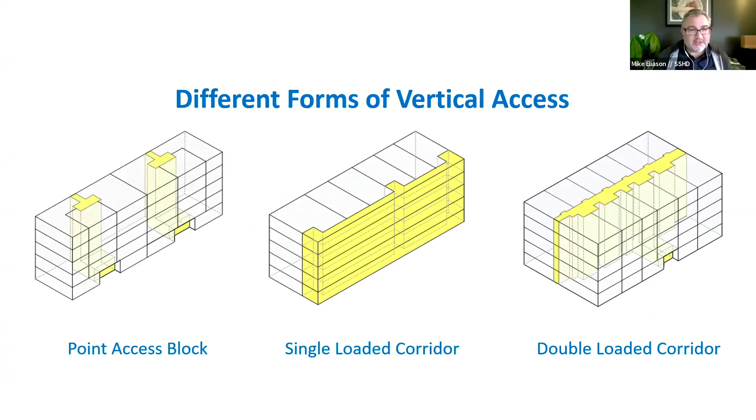So instead, what you'll see in new development like this is a bunch of smaller buildings that compose a much larger block. These are a broad mix of housing types. You could have co-housing next to social housing, market rate housing, condos, right? So at the block level, you get this really kind of elegant mixing of diversity, both economically and socially, that really is missing in a lot of the development in the US. So I'll talk about my approach to this, how my thinking really came around on single stair, some of the benefits, some of the issues around public health and climate that I think really make these better buildings. We basically have three methods of reaching units in buildings, and it turns out that the way that we get to these units has pretty dramatic knock-on effects.

The main one that we'll see in the US is the double-loaded corridor. This is required anytime you're taller than 3 stories or you have more than 4 units per floor. It's moderately efficient. It primarily induces smaller units, though, right? So it's really difficult to get large family-sized units, except on the corners. It's inducing a lot of windowless bedrooms as well. Primarily, we put dense housing on arterials, major highways. And so if you're on a loud street, you can't really get away from that noise if you're on the side of the building facing the street, right? So these really are hotels. We're designing our multifamily buildings to be more like hotels. And so it has really different qualitative effects versus the status quo of development the world over.

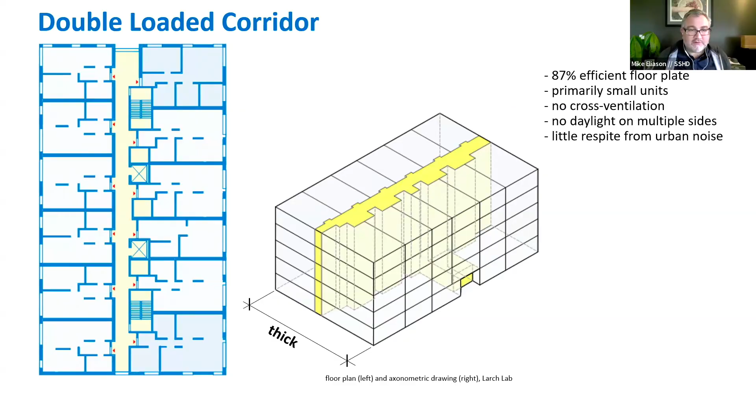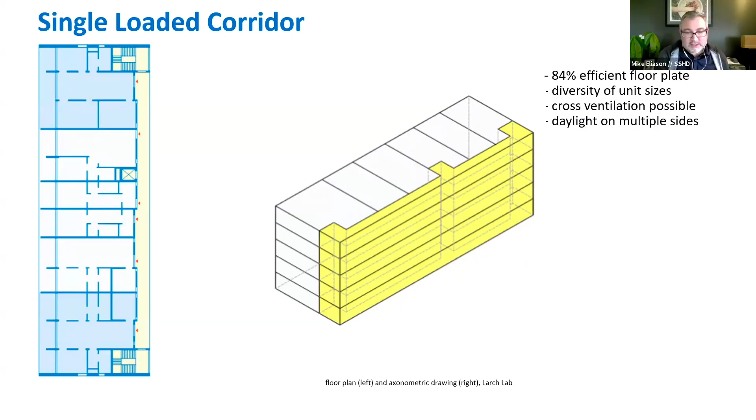Single loaded corridor is actually more common in Switzerland and a number of other European countries. You get the ability to cross ventilate. You can have daylight on multiple sides. It's not as dense. It's harder to get more units than you would find in a double loaded corridor or a single stair. And so, for a number of reasons, we don't really see it utilized here. But the point access block, the single stair building, is really the workhorse of urban housing pretty much the world over.

The idea is you've got a handful of units that are all around a single core, elevator, stair. These buildings tend to be more compact. They are incredibly efficient in terms of floor plate. They're much thinner floor plates than we see with double-loaded corridor buildings, and so there are more opportunities for green space, community, and things of that nature.

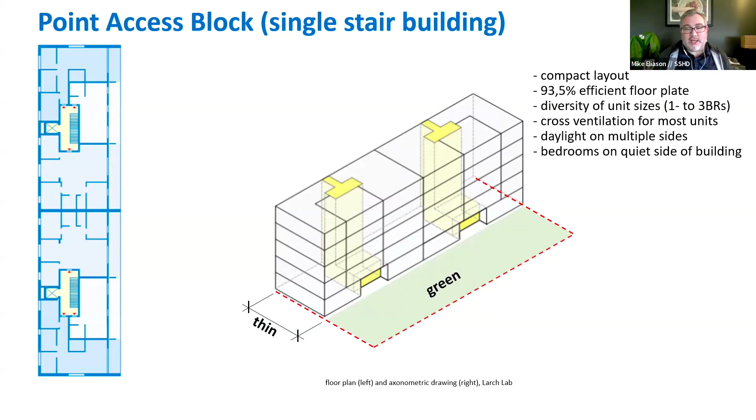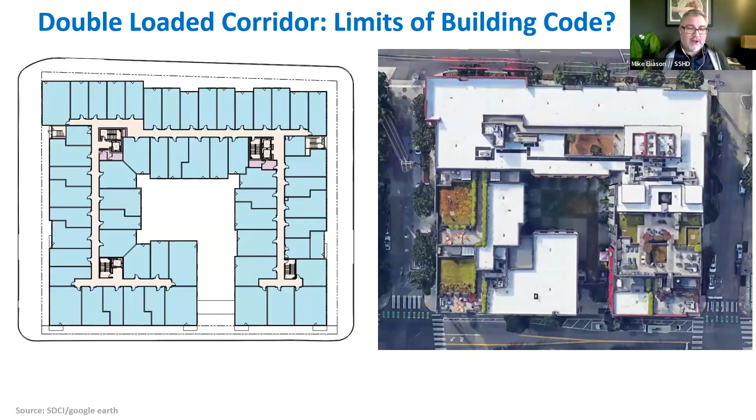And the double-loaded corridor is really the status quo of pretty much all development in the U.S. We're kind of reaching the limits of it. On the bottom left, you can see a corridor with a couple of units that are separated from the stair right there. So we actually already have conditions in our multifamily buildings that are more dangerous than you would find in single stair buildings. So you've got 1, 2, 3, 4, 5, 6, 7 units that if there's a fire right next to that stair on the bottom left, they wouldn't have any exit to access whatsoever.

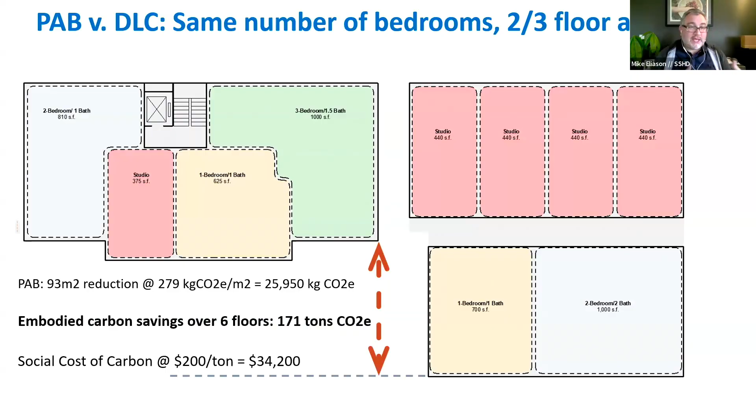Right. And so this compactness, what's really interesting about it is in less floor area, we start to get the same number of people, maybe not the same number of units, although there are some ways to play around with that. This in turn, I think, leads to potential cost savings, embodied carbon savings, right? And then, like I said, our buildings are thinner, and so there are more opportunities to play around with other things on the site around the building.

Our codes and our financing regimes have effectively eliminated small scale development in most of the US. And so we've really seen small buildings, under 30 apartments, really fall off a cliff, whereas buildings with more than 50 units are now the norm. This is completely outside of the norm for most of the world. In Germany, a fourplex has been the median building for almost 70 straight years.

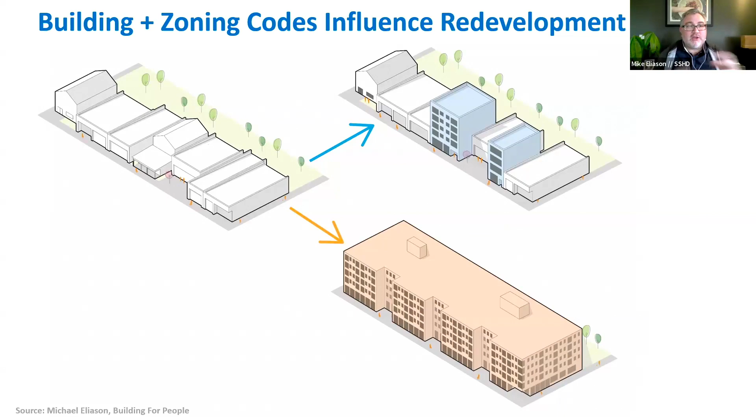And when we're thinking about how places redevelop, right, the single stair allows small scale urban development, that fine grained development to happen over time. You don't need parcel assembly. So if you're a building owner, you can just sell your lot to one developer, or you could redevelop it yourself and do your small little building. And so you get this more fine grained redevelopment instead of what we tend to see, which is one developer comes in and buys up most of the block or all of the block and then completely redevelops it. And you lose that fine grained nature. You lose all those businesses that really made such a great place to live.

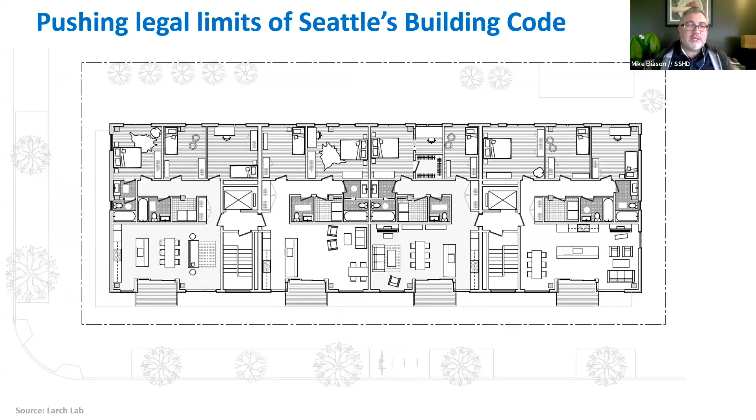This is a study that we did for Seattle when I was at Larch Lab. Our conditions allow up to 6 stories. So the US baseline is 3 stories. Seattle allows up to 6 stories. We can do up to 4 units per floor, so 4 units per stair per core or per floor. We can do 2 of these conditions. So we can get moderately scaled buildings, right? So 24 to 48 unit buildings with these kinds of conditions.

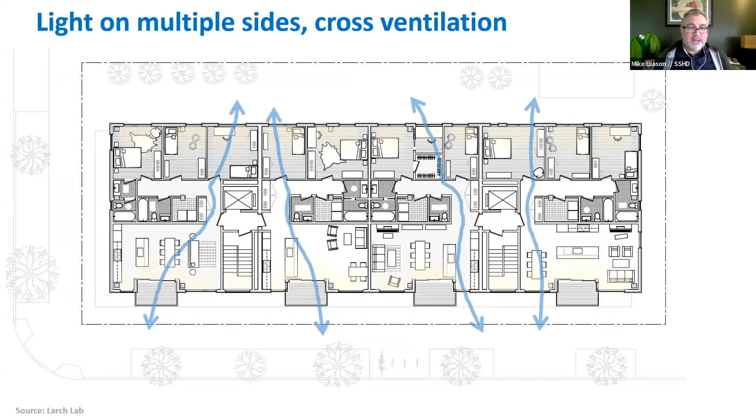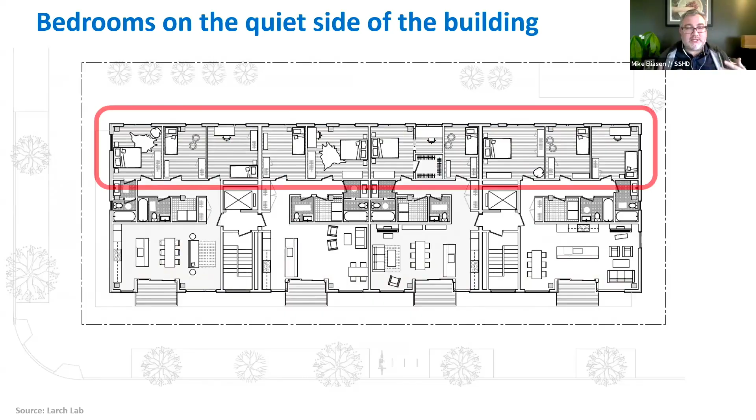What I find really fascinating, though, is it allows us to start living in ways that you don't normally see in multifamily buildings. So the point access block allows you to have daylight on multiple sides of the building. It allows for cross ventilation. If you happen to be on a busy street, you can put all the bedrooms on the quiet side of the building, right? And so when people are sleeping, they're protected from that noise, and it's a much greater sleeping environment than you would have if you're directly on the street itself.

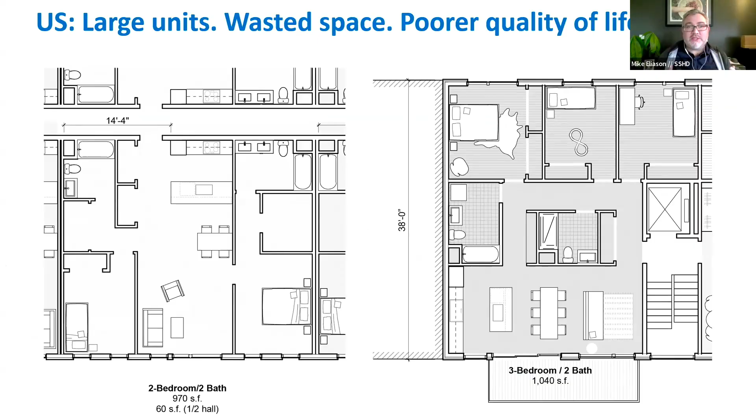Another aspect of this is our deep floor plates and the double loaded corridors induce these really large units. On the left, you see a 2-bedroom unit. It's a really deep floor plate, so we're just trying to cram in as much stuff as we can. We end up getting 2 full suites, a kitchen that's not really near a window, lots of storage space. It's about 1,000 square feet. In Europe, that same building would be a moderate 3-bedroom unit with 2 bathrooms, and then a kitchen, living, dining oriented parallel to the facade, rather than perpendicular. And so all of these rooms are getting much better daylight qualities.

But that's not really the case, right? The single stair building, the point access block, allows us to get better units. It also kind of induces larger unit sizes, right? So we get more family sized units. I can't even remember the last time I saw an apartment in Seattle that had 4 bedrooms. They're almost non existent, but they're really, really common in European housing.

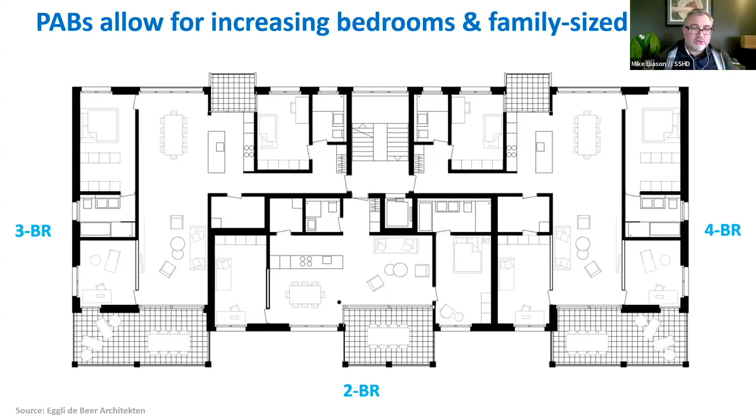None of your buildings would have windowless bedrooms, which we're seeing more and more of here on the West Coast. And so there's these limitations around the number of units per floor. Developers still want to maximize the amount of built area that they can get, right? And so it kind of induces these larger and larger units than you would typically find in status quo development.

And in Europe, this isn't just utilized for small scale development. For large scale development, they'll chain all of these single stair conditions. This is a large cooperative in Switzerland. Each one of those yellow boxes is a stair core and an elevator core. So it's 5 single stair conditions that are all connected together.

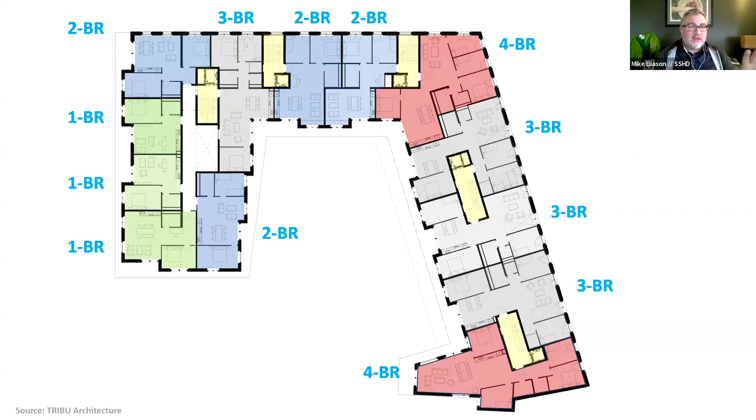What's really fascinating to me is on the reentrant corners, so the inside corners of the building. Here in the US, you'd only have windows or daylight on that one wall on the reentrant side. What single stair allows is the windows can go through to the opposite side, right? So those interior corner units actually have daylight on 2 and even 3 sides. It's just a completely different way of thinking about housing than we typically see.

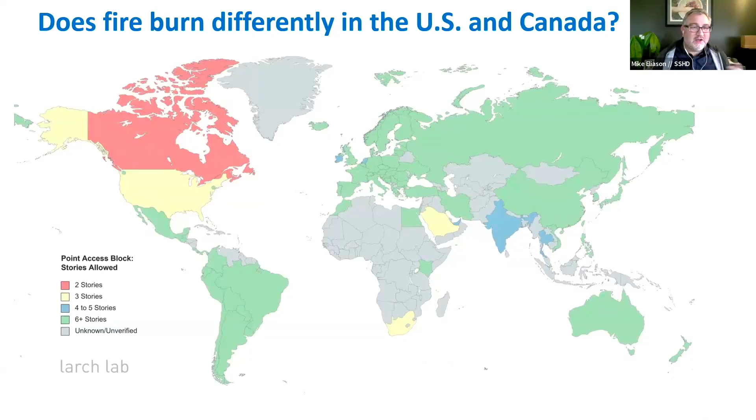And so there's this overarching question to how we design our buildings, right? Does fire burn differently in the US and Canada? Well, our codes seem to think it does. The rest of the world doesn't see things that way. And so we have these deep units. It's really like living in a bowling alley. You only have windows on one side, unless you're lucky enough to live on a corner.

Is this a substitute for living in a detached house? Is this a substitute for living in a townhouse? I would say it's not. But the typical unit layout in a single stair building for a family sized unit, right? Abundant daylight, lots of windows. It's a very different way of living. It's not like living in a single family house, but it does offer a lot of those qualities, the things that people want when they're looking for something like that, while still living in an urban environment.

And for some reason, the Swiss regulations around buildings allow the Swiss cooperatives to have the highest quality of life, the best designed buildings that I've ever seen. So they're really the gold standard for me right now and what we should be striving to achieve. And I have a lot of concerns about the future of buildings in the US. The International Building Code, which is our code for multifamily housing, is inducing really deep and darker units, lots of windowless bedrooms.

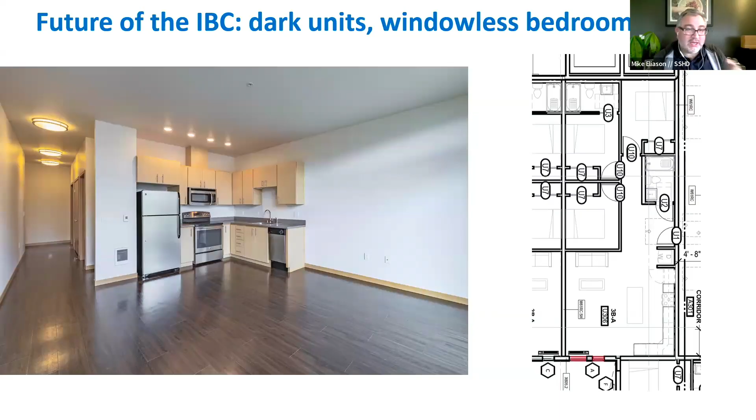There's a development underway here in Seattle. It's a 3 bedroom unit, the one on the right. That little red section right there, those are the only windows it has. It's 3 bedrooms, and none of the bedrooms have windows, right? So we're trying to force in as much density, as much housing as possible. But the way that we're doing it is, I would say, not really great in terms of livability or quality of life.

And so some of these knock-on effects that I was talking about earlier, right? You can get a much better home, daylight on 3 sides. This is a Swiss single stair building on the left. This is a 3 bedroom unit in a double loaded corridor on the right. The 3 bedroom unit in the US has more doors. It's got fewer windows. It's got way more wall area, way more paint. It's a very different way of living in an urban environment.

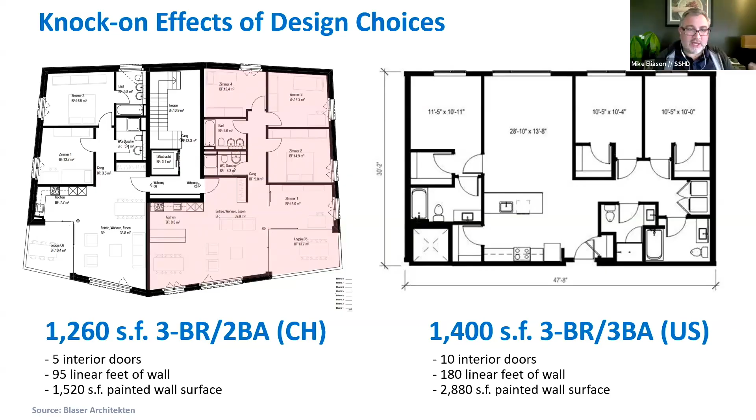The Swiss building is really compact. All of the plumbing is much more compact. There are knock on effects related to that as well. And so there is, I think, extensive cost saving potential in single stair buildings when we think about all of these other effects, mechanical, plumbing, and so forth. This diagram shows some of the compactness of the Swiss building on the left and the other building on the right. What really stands out to me is just the limited amount of daylight that you have in the U.S.

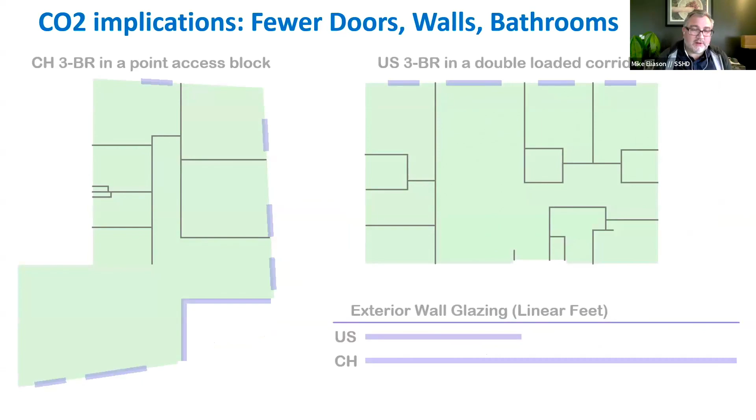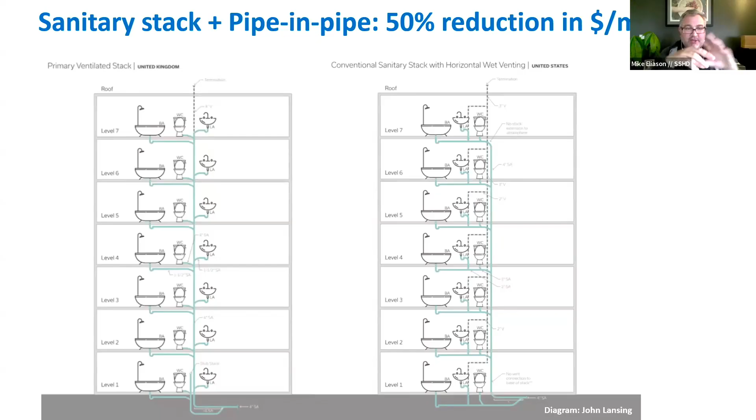building, and this is pretty typical for large 2 and 3 bedroom units and multifamily housing in the U.S. Like I said, the knock-on effects related to single stair, I think, start to become really, really interesting with something like plumbing, where we can start to make all of our plumbing super compact. There are opportunities for significant savings in plumbing, also embodied carbon of our plumbing materials, that we really can't do because of how things are distributed in our typical double loaded corridor buildings.

This is a 4 or 5 story single stair building in Switzerland. What I love about this is all of the plumbing is basically on one wall. That red square in the middle, it's 4 bedrooms, 2 showers in the plumbing core in the middle. You've got 2 bathrooms, one with the shower, one with the tub. It's got a storage room that has your laundry closet, and then it has your plumbing wall, right? That compactness is not possible in the way that we design our typical status quo construction.

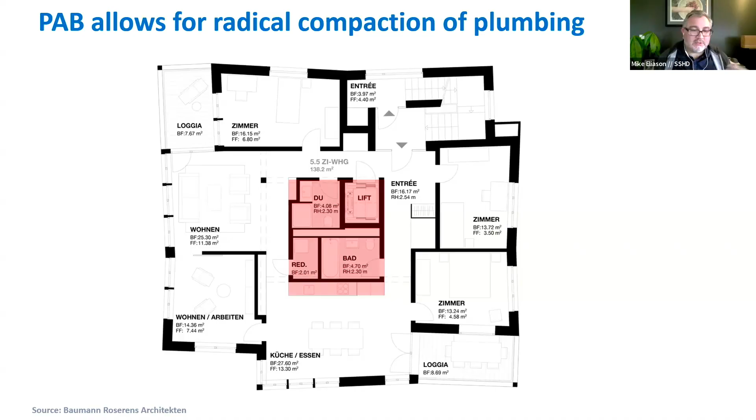And so that is all I have. I did write Building for People, if you guys are interested in learning more about single stair, eco districts, how carbon and livability and better places can all come together. This has really been the effort of my work the last couple of years.

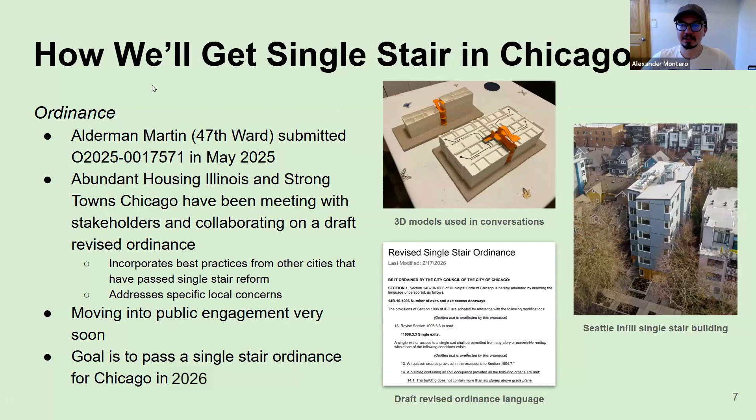Like I said, we're all volunteers here, and I'm at a stage right now where I had heard about this maybe a year or two ago. But at this point, I'm by no means an expert. I'm not an architect, but I know way more about stairs and staircases than I thought I ever would in my entire life. And it's been very cool to connect with really knowledgeable people and figure out how we get this and how we bring it to Chicago. So I encourage you to come join us and help us out in this.